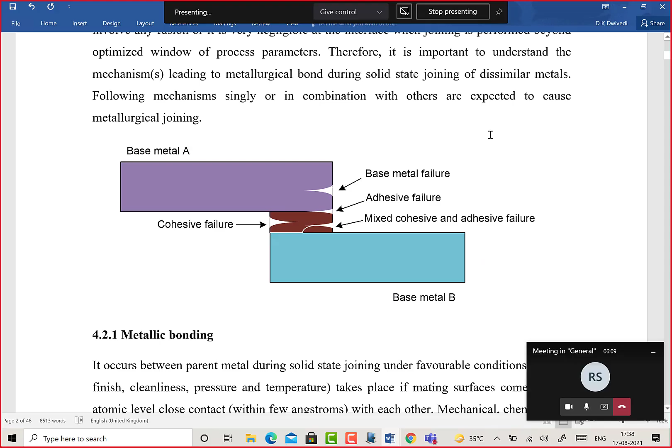The solid state joints are less commonly used for joining the same metal because those joints can be easily done using other joining processes, including fusion welding, except when the metal is very sensitive to heat. Metals with extremely high sensitivity to heat application are preferred to be joined by solid state joining for same metal joining, like metal A and metal A, both components joined together using solid state joining.

If you take any joint, it can fail from any location. Say this is one member and this is another member. These can be joined using a number of approaches: there can be the brazed joint, or the soldered joint, or an adhesive joint just at the interface, then there can be the fillet at both ends. Whenever these joints are developed, they will have a certain tendency to fail under the effect of external load during service.

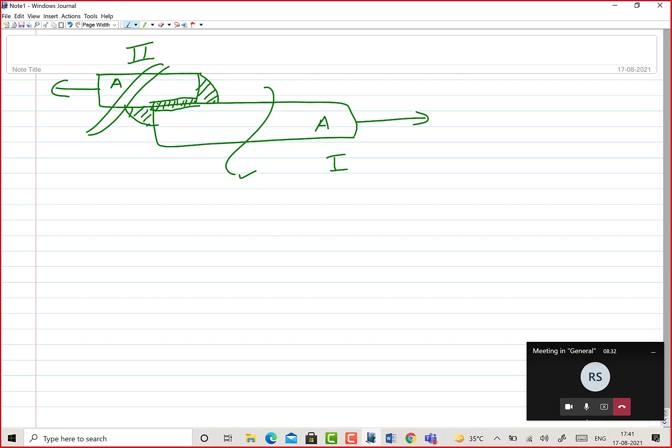This failure can occur from multiple locations. The failure can occur from here itself, like say this is metal A, even if it's the same metal with two parts, part 1 and part 2, being joined. Part 1 can fail or part 2 can fail, from the base metal. This is what we'll call failure of the base metal, where the joint is still strong.

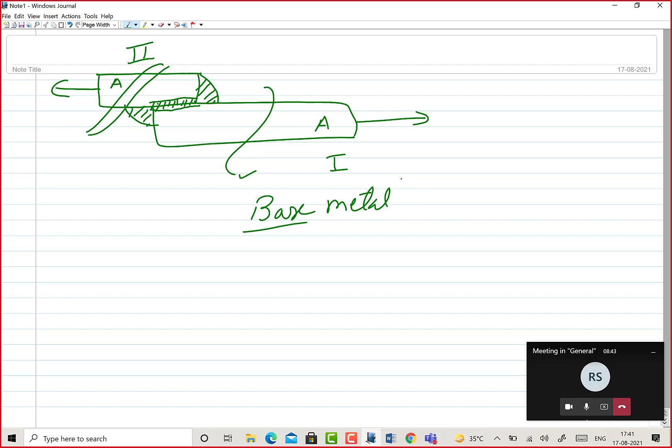The next possibility of failure is where the failure occurs next to the weld region, that's the heat affected zone or the toe of the weld. This is the second situation where the failure is related to the stress concentration zones, at the toe of the weld.

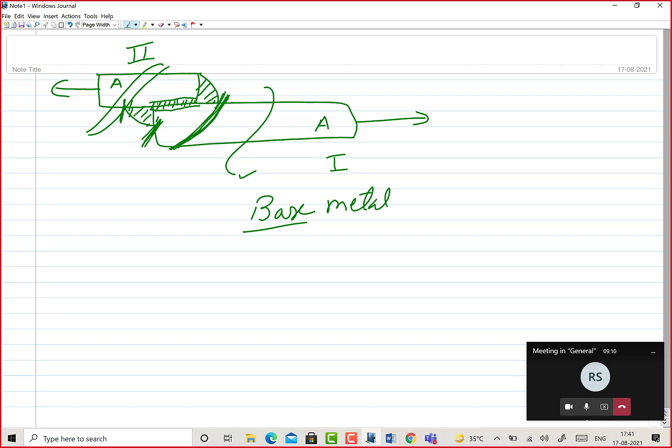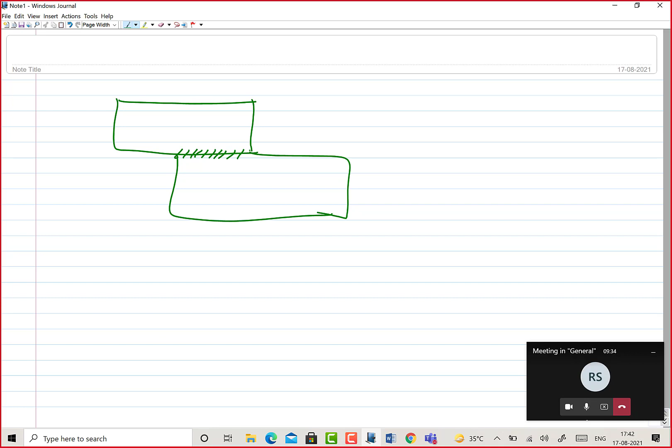The third situation is where things fail directly in the weld zone itself, which can be at the interface. Whenever failure from the interface takes place, it means there is a weakness, the joint is not perfect and we need to work on this region. So wherever the failure in a joint takes place simply indicates the location of the weakness. Interface failure is very common in case of brazed or soldered joints, or also in adhesive joints, because they are not actually as strong as the base metals.

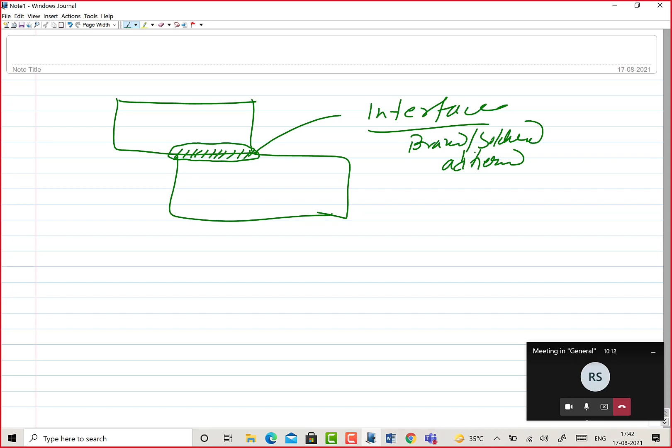But in case of weld joints, where fusion is taking place of the same metal, failure can occur from the base, or from the heat affected zone, or from the weld area itself if it is defective. That is what has been shown. A similar kind of situation you will see in case of solid state joints as well, that is what I was trying to explain using this diagram.

Here this is metal A and metal B, and the two have been joined. What are the various possibilities for failure to take place? This is an example of adhesive failure, or an adhesive joint. The failure can occur from the base metal on one side, or it can fail from the other side base metal. Then there is a possibility of failure from the interface of the joint and one side base metal, or the interface of the joint and the other side base metal, or the joint itself can fail like this.

In case of adhesive failure, when the adhesive itself gets failed, it is called cohesive failure. Otherwise it is adhesive failure, where the interface of the base metal and the adhesive material is getting failed. When both the cohesive failure and the adhesive failure are mixed, then we call it mixed failure. Here adhesive as well as interface failures are both involved, so we'll call it mixed cohesive and adhesive failure.

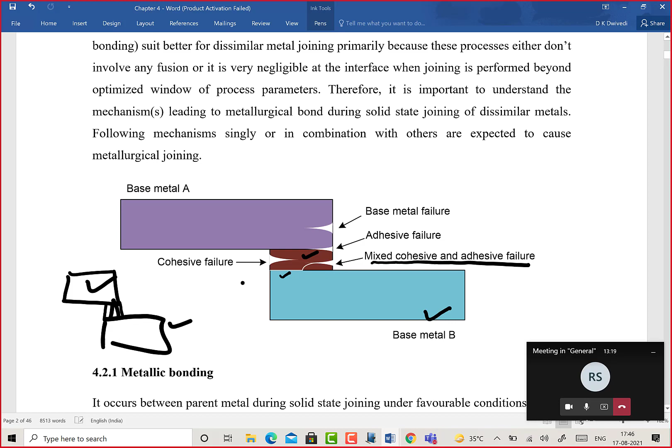A similar kind of trend we can see in brazed, soldered and other weak joints. Now in the situation where we have metallurgical connectivity, either between the same type of metals joined together, or metallurgical connectivity between two members whether of the same metal or different metals, what are the different ways by which the joint is developed, that is what we will see next.

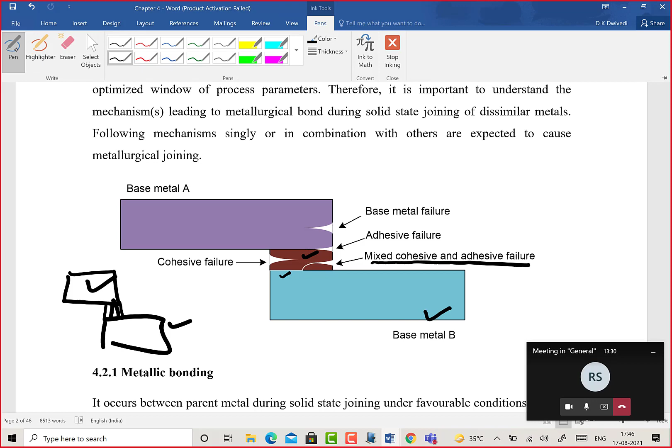We have to see certain mechanisms that play a big role in this process. If we list out the mechanisms responsible for development of the solid state joint, this includes the metallic or atomic level bonding. This is when the two surfaces are brought extremely close to each other.

So there is an atomic attraction between the metals of the two members which are very close to each other. The second mechanism is diffusion, where elements diffuse from one side to another due to concentration gradients of different alloying elements, and they form metallurgical connectivity through diffusion.

The next one is mostly recrystallization, and one typical situation is dynamic recrystallization, which is coupled with deformation and high temperature application. So during the deformation coupled with high temperature, during the joining itself you will be getting newer grains formed - the dynamic recrystallization.

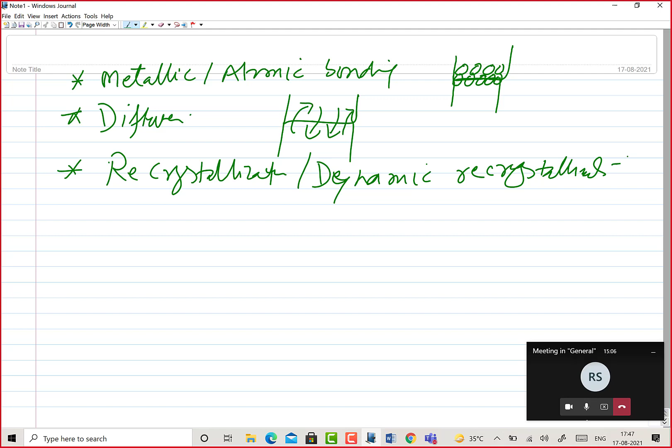So initially you had grains like this on one side and different grains with a different orientation on the other side, and when the two are joined you will see that there is no separation and distinction where the grains were before joining.

So the newer grains even at the interface are developed, and you will see that there is no demarcating line at the interface. This is attributed to recrystallization, or dynamic recrystallization, depending upon the level of deformation involved. If just heat is involved we call it recrystallization; if deformation is coupled with heat application, then it is dynamic recrystallization.

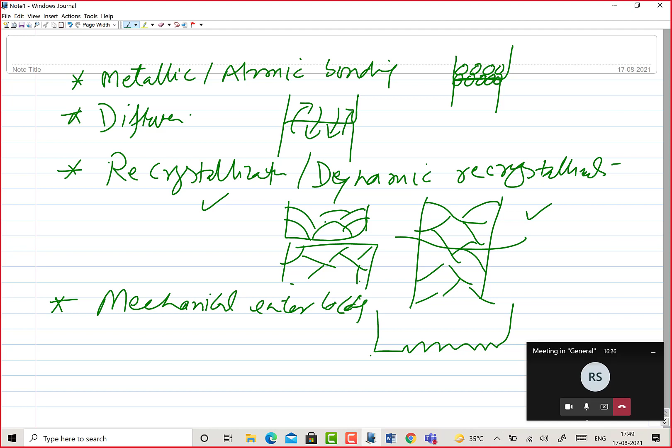Then one very common mechanism in solid state joining is mechanical interlocking. This can be easily seen in a number of joints, like joining of simple wires by twisting. This is very common in processes like ultrasonic welding and explosive welding, where micro level deformation takes place from both sides.

Initially the asperities are connecting with each other at the interface, and once deformation takes place you will see that all these asperities are highly intermingled or interlocked with each other. So this is the kind of structural orientation you will see here.

It can be simple plain mechanical interlocking, or it can be wavy interlocking like this, where some kind of wave at the interface is developed. This is an example of flat mechanical interlocking versus wavy or sinusoidal mechanical interlocking. In both cases, this kind of interlocking is at the micro level only, and it also contributes a lot to development of the joint with the desired strength.

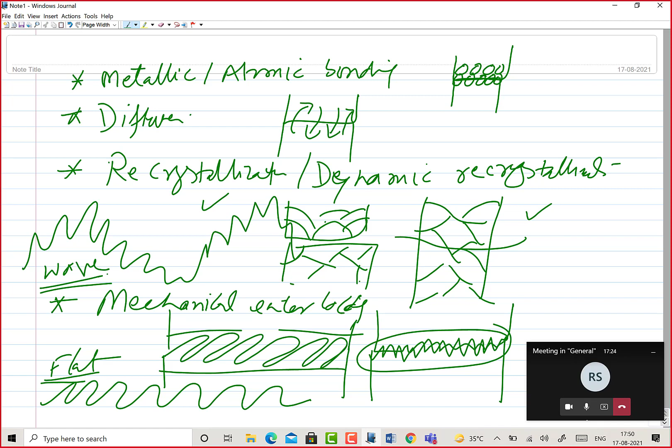Sometimes we also come across localized melting here and there. This is common in processes like ultrasonic welding and diffusion bonding, or if there is inappropriate control of the heat in other processes, then also melting can take place.

This melting occurs at two locations, in two situations. One where low melting point constituents or phases present at the grain boundaries melt, like the eutectic present at the grain boundaries, which melts in a very localized manner. The second case is where low melting point interlayers or fillers are used in diffusion bonding - that is an example of transient liquid phase bonding.

This is done intentionally. So one situation happens because of the presence of low melting point phases, and the second is where the melting is intentionally realized in order to develop the required diffusion bond. So these are the two situations.

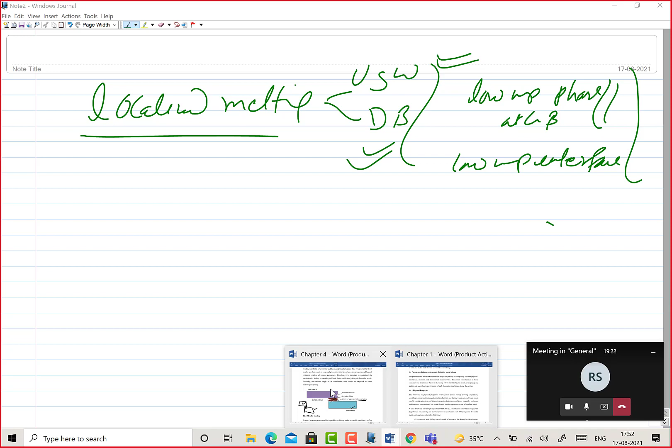So here what you see is the metallic bonding at the atomic level. What you have basically are the two different components with different grains and alloying elements.

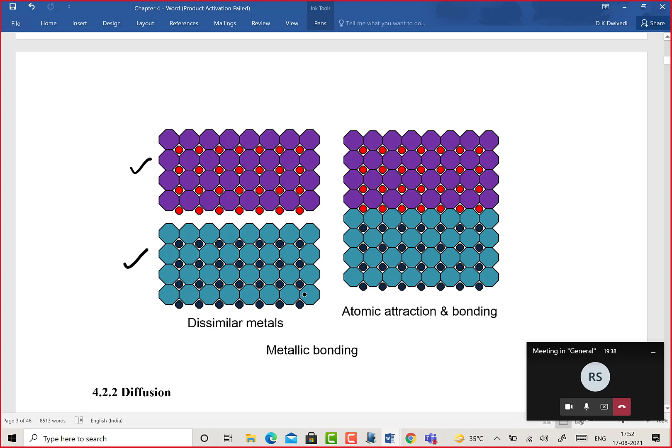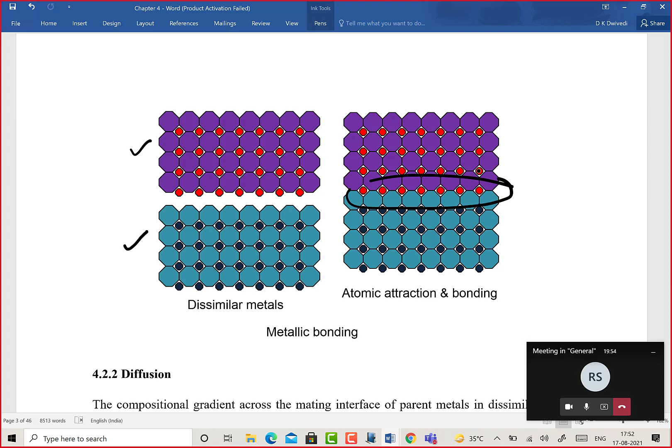When the two are brought very close to each other, you will see there is atomic level closeness leading to a good attraction between the atoms at the two sides, and some kind of weak bond is developed.

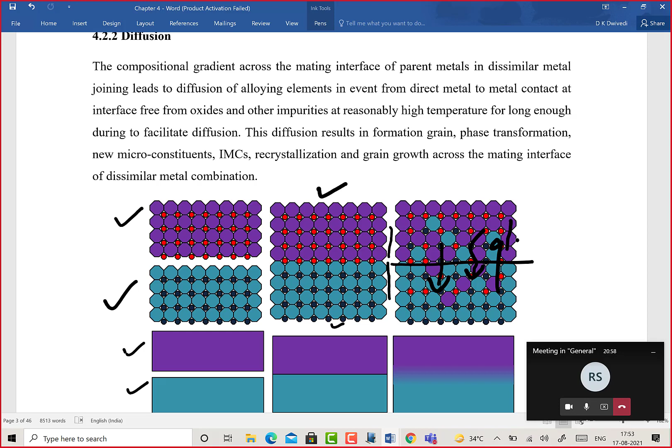So diffusion across the interface is taking place, and that will lead to the formation of new grains. You will not be able to see a very clear demarcating line, but a very diffused one. These are two separate components brought into firm contact with each other, and when diffusion takes place across the interface, there is no very clear demarcating line across the grain boundaries—even the newer grains you can see.

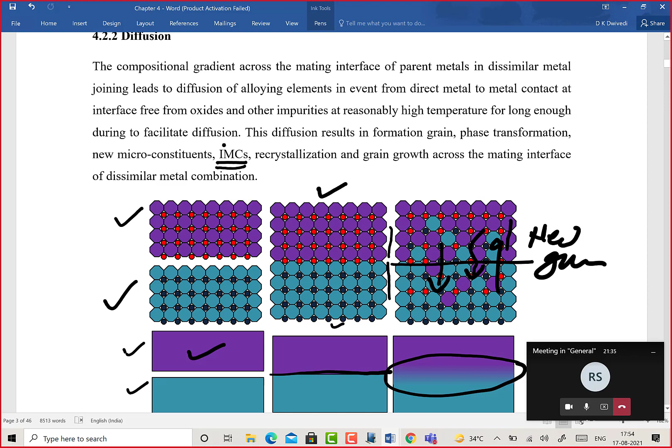So this is the case of diffusion, and if the two are incompatible with each other, then certainly they will form some kind of intermetallic compound, or newer phases can also be formed.

Localized melting is a third mechanism, where you will see that the two metals, or even the same metal, may have low melting point phases at the grain boundaries. So low melting point phases and impurities can reach the molten state—this is, you can say, discrete melting here and there.

The second case is where the interlayer has been intentionally used. With the application of heat, this interlayer will melt and then diffuse—the elements can diffuse from the interlayer into the base metal. This is what is typically achieved in case of transient liquid phase bonding, where things melt and then diffuse out.

Once the diffusion completes, solidification starts due to the change of composition of the molten zone which formed during diffusion bonding in case of transient liquid phase bonding. Localized melting can occur here and there—say you have used some kind of interlayer, it leads to a eutectic reaction and melting takes place here and there.

There is a possibility that melting can lead to weakening because of the formation of brittle and weak phases, or it can lead to improved bonding. It depends on the kind of constituents formed as a result of the melting.

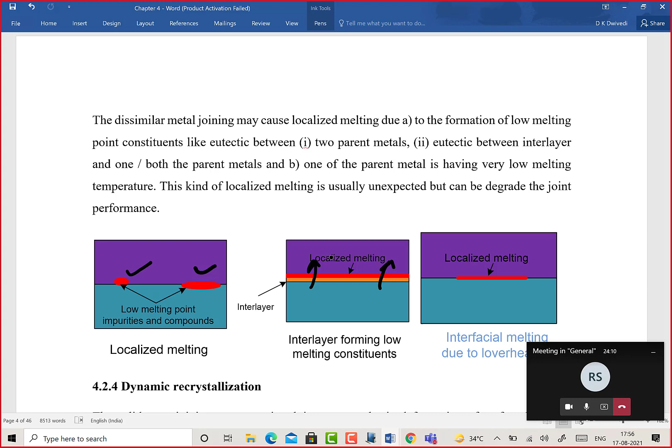In that case the strength may be quite good, while in other cases where it is not intentional—where the low melting point phases are formed unintentionally, or present due to poor control over the composition—the strength may be badly compromised.

Dynamic recrystallization is very common in case of solid state joining processes where plastic deformation is involved. Whenever there is plastic deformation coupled with heat generation, coming either from friction or deformation, that will lead to dynamic recrystallization.

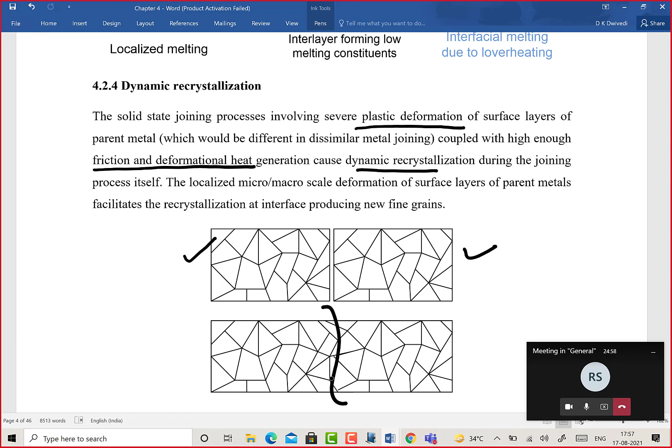Say initially the grain structure of the two members is like this. When the two are joined with the help of micro or macro level deformation, you will see there is no clear cut demarcation—newer grains are formed across the interface in the two components. This kind of situation will lead to the development of a good weld joint.

Mechanical interlocking is the next one, which is very commonly observed in explosive bonding, electromagnetic welding, and ultrasonic welding.

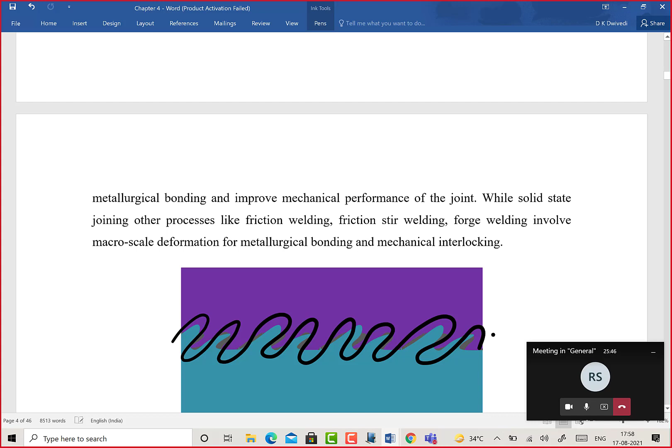In all these cases, all these processes are used for joining a thin sheet with another member. There can be tubes, there can be thin plates. In both cases, what we see is some kind of mechanical forces used to cause interfacial deformation, and whenever that takes place, you will see localized deformation occurring at the interface. This is a typical example of interlocking.

Mechanical interlocking. But when two metals are brought into very close contact, they may be metallurgically incompatible, so they may also form some undesirable constituents at the interface. However, the amount of those undesirable intermetallic phases may be very limited, but still those are formed.

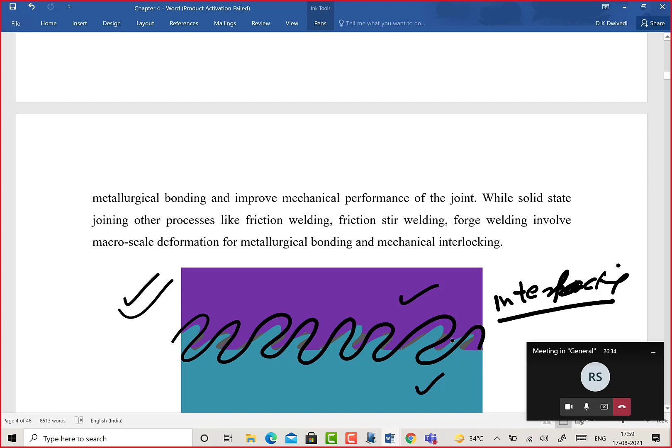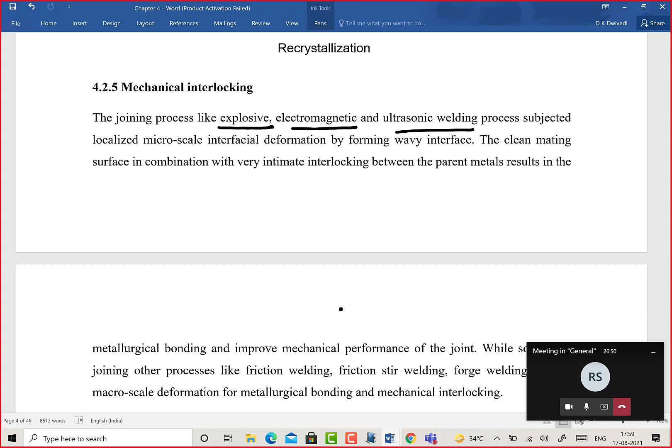Solid state joining processes like friction welding and friction stir welding are based on large scale deformation. But what I am showing you here is basically related to micro-level deformation, which is observed in case of explosive bonding, explosive welding, electromagnetic welding, and ultrasonic welding, leading to mechanical interlocking.

So here, since we are not achieving the fusion state for developing metallurgical continuity between the two metallic members, whether they are of the same or different types, to develop the metallurgical continuity in case of solid state joining processes, two things are very prerequisite.

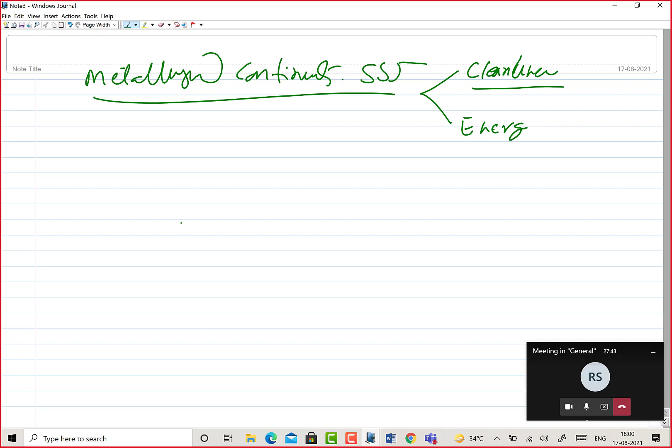Two things are important: one is the cleanliness, and the second is the energy barrier must be overcome. So crossing or overtaking the energy barrier and the cleanliness — these are the two important things.

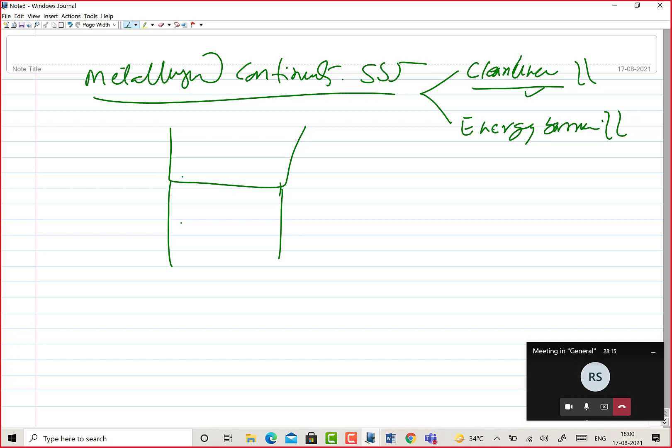This cleanliness-related aspect I have talked about a number of times earlier as well. To realize metallurgical continuity, we need diffusion across the interface, and to facilitate the diffusion, there must be direct metal to metal contact at the interface, free from any thin layer of impurities present on the actual surfaces.

All oxide layers, adsorbed gases — these must be removed, and it depends a lot on the type of oxides and nitrides being formed, their properties, particularly hardness and brittleness.

If these oxides are soft and ductile, then certainly you cannot do it easily. Rubbing can help remove these surface impurities easily if they are hard and brittle, and this is further easier in case of dissimilar metal joining, because if it is similar, both will behave in the same way. If dissimilar, they behave differently, and it becomes easier to cause separation and removal of these oxides and impurities from the surface.

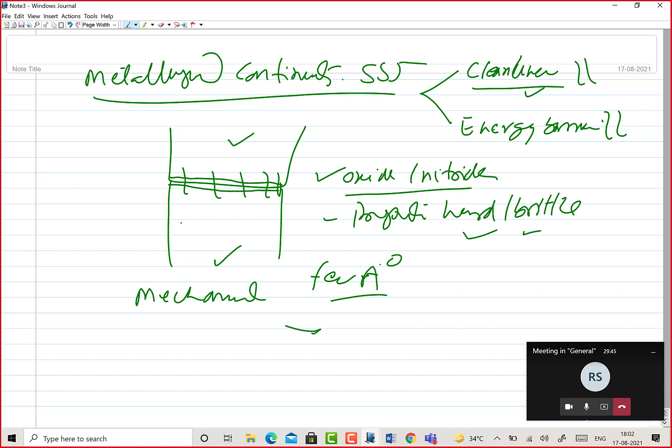That is why just mechanical cleaning will not be good enough, because these layers are very thin, maybe a few angstroms, and very hard and brittle, especially like chromium and aluminium oxides. These oxides are very stable and very adherent, very coherent with the surfaces, and very thin also. So just mechanical cleaning may not be good enough.

You need chemical cleaning as well for removing all these impurities present at the surface. Sometimes in solid state joining, if interfacial deformation is involved, that will inherently clean the surfaces and try to clear all these impurities.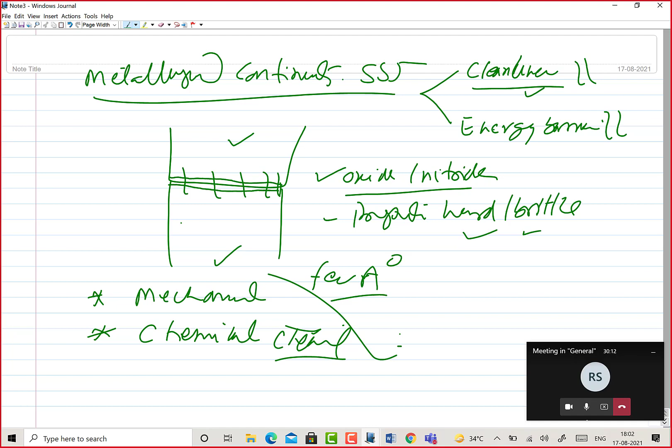On the other hand, as I said, the mechanisms involved are primarily diffusion and recrystallization. And there is a third mechanism also that you see.

To develop metallurgical continuity, both are usually present in solid state joining. There must be sufficient amount of energy applied in the form of heat to facilitate the diffusion and to develop newer grains through recrystallization.

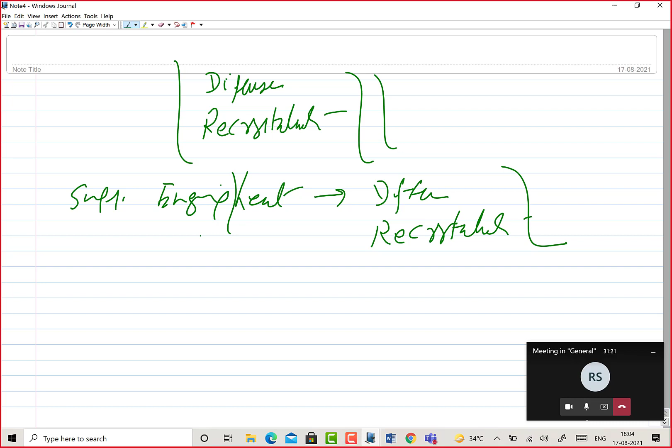So one philosophy is this: this energy required to facilitate the diffusion as well as recrystallization must be supplied to facilitate the metallurgical bond in case of solid state joining.

But the problem here, and this is very common in most solid state joining processes, is that we apply energy in different forms, whether it is deformation or frictional heat — it is always there, and that is why we get both the diffusion as well as the recrystallization.

This is one aspect. But the problem in acceptance of this hypothesis is this: if you take two metals and put them in firm metal to metal contact with each other under sub-zero conditions...

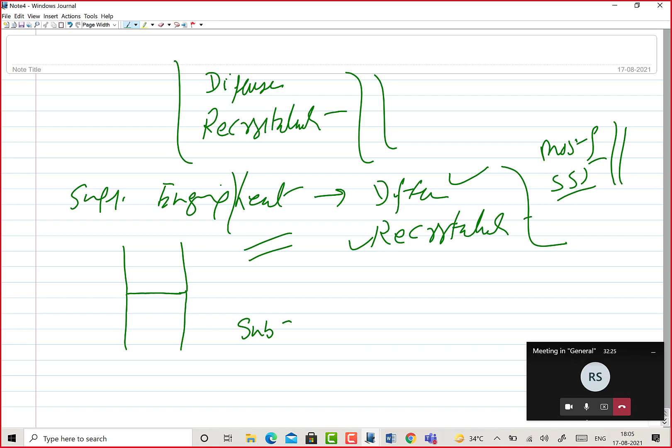When we are putting the two components in firm metal to metal contact under sub-zero conditions, there is no driving force for diffusion and recrystallization to take place. Still, the joint is developed, maybe it will take 4 months, 6 months. It is very difficult to expect any kind of recrystallization and diffusion occurring under sub-zero conditions. So that is why these are the two theories which are not equally acceptable for all situations.

There is one more aspect that has been explained: misorientation. You know that at the grain boundaries, the arrangement of atoms is highly irregular, the structure is amorphous. Similarly, the surfaces of the two components to be joined may have different grain orientations, different arrangement of atoms, different kinds of crystal structures. So it may not be the same necessarily, even in similar kinds of metals.

So to have metallurgical continuity from one side to another across the interface, the energy must be overcome for facilitating the metallurgical bond through the misorientation. So energy to overcome the misorientation of the atoms to facilitate the metallurgical bonding is the third aspect which is being proposed, apart from the energy requirement for diffusion and recrystallization. People are still working on to understand this aspect, like what is its importance and significance in the development of solid state joints.

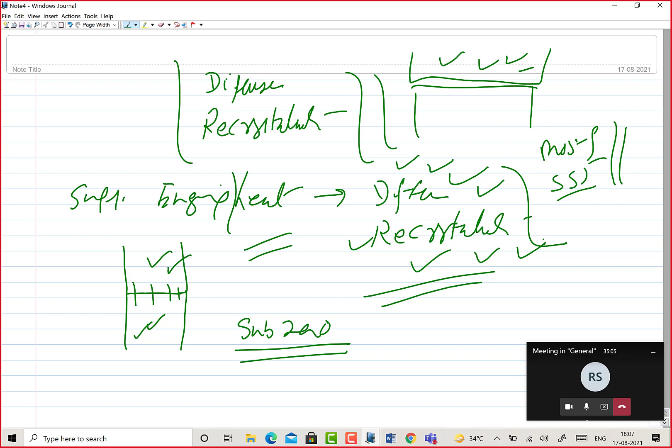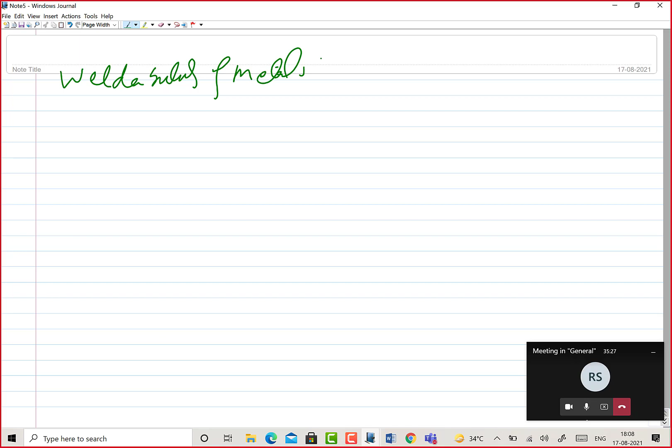Now coming to the another, third aspect about which I wanted to talk here: weldability of metals by solid state joining processes. So how to understand this, and why it is different for different metals and different situations. Now, ease of joining - how do we characterize this ease of joining or ease of welding?

Power can be one thing because it is affecting the cost. But this is not a very good way, because in any case we have to apply the energy. So what we do basically is quantify energy consumption per unit length of the weld, which may be different for different processes as well. Energy requirement.

Penetration is about whether the joint is perfect or not, right? The joint is imperfect if it is partially penetrated - it is imperfect and you will simply reject it. So there are certain ways to understand this. Let us understand what weldability is and how we characterize it in a comprehensive manner.

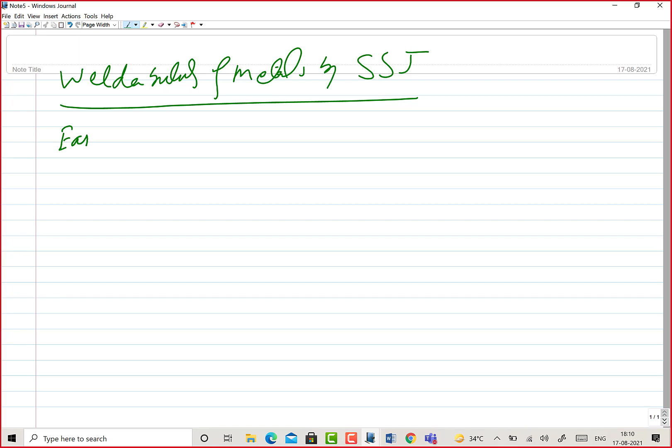The thing is, weldability - you see it is very easy - it is ease of joining or welding of a given metal, we will say, because for different metals the weldability is different. But for what? Again, there are a number of constraints. Ease of welding or joining of a given metal.

Now we will be putting in constraints: ease of welding of a given metal for a given procedure - you can say it is the joining procedure. So, ease of joining or welding of a given metal, by a given welding procedure, for a given purpose - joints can be developed for different applications; for one purpose one joint is fine, but for another application the same joint may not be acceptable. So what we say: ease of joining of a given metal by a given welding procedure for a given purpose, under a given

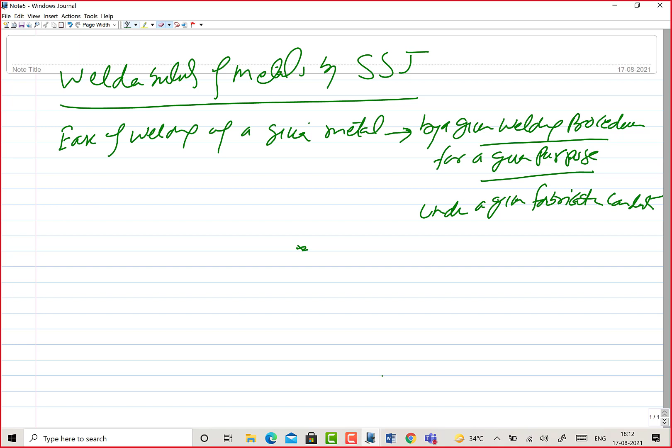If you change any of these things - say, for example, if you take a metal A, when it is welded by process X, for purpose Y, and under fabrication conditions Q, then things are not workable, things are very poor. Why? Because it's not happening, or it is taking too much cost. If you work with another process, say your process is Z, the purpose is P, and your fabrication conditions are R, then with another set of fabrication conditions, it's fine, it is acceptable.

Let's take an example: if you take aluminum and use SMAW, you may find the joint is not working for the purpose. But when you weld aluminum by GTAW or GMAW, the joint is perfect and very easy to make.

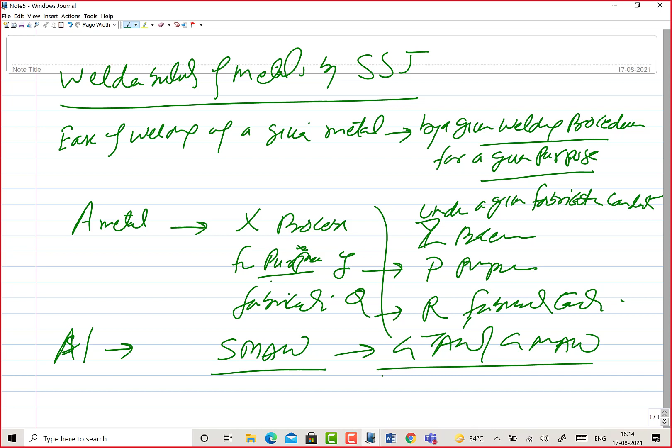Now I'll take the things related with the purpose. You make a steel weld very easily, whether it's solid state joining or any other process, and it works fantastically under normal ambient conditions, say temperatures from 20 to 40 degrees, it's fine. But when the same weld joint of steel is used at -10, -20, it doesn't perform, it loses its toughness, it loses its ductility, it becomes brittle. So your joint is not able to perform under impact or tough conditions. The purpose has changed.

Similarly, in fabrication conditions, whether it's aluminum or steel or any metal, any welding process being used, the easy position to weld is downhand, then it becomes more difficult, like welding a pipe, or welding a very thick sheet of 50mm versus just 0.5mm—all are very difficult. So fabrication conditions may change significantly. Similarly, a simple butt joint will be easy, but an edge joint or corner joint will be more difficult. So depending upon the fabrication conditions, your ease may change significantly. This is just one aspect.

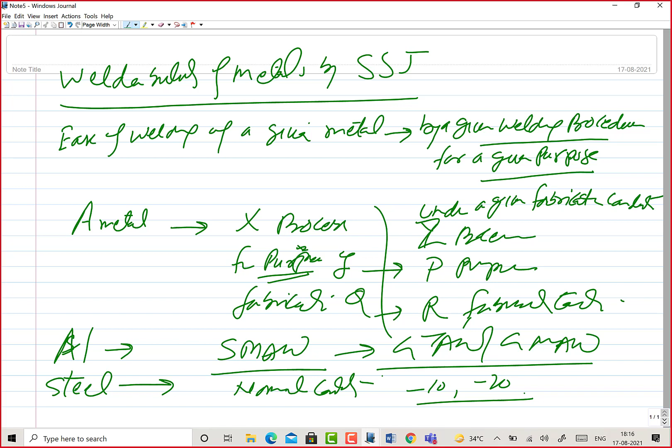Let us take other aspects, because I have used three words: first, the procedure; second, the purpose; and third, the fabrication conditions.

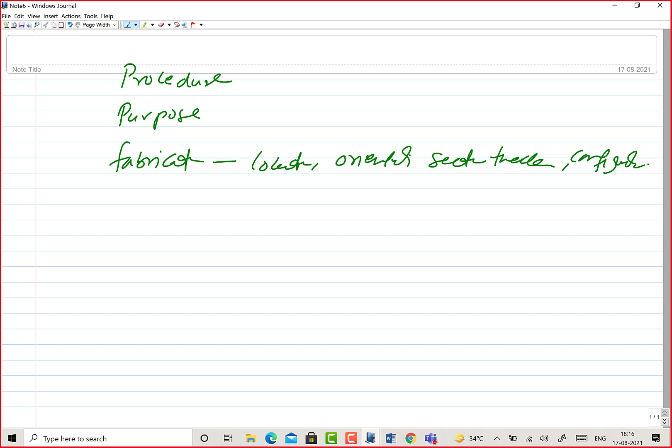There can be a number of aspects related with the location where the joint is to be made, the orientation of the plate, section thickness, and the configuration in which the joint is being made—whether it's a lap joint or butt joint, or where the joint is to be made. Then the purpose: there can be n number of situations—normal ambient condition, static loading, fatigue loading, creep, or low temperature application. So as per the case, the situation may change significantly.

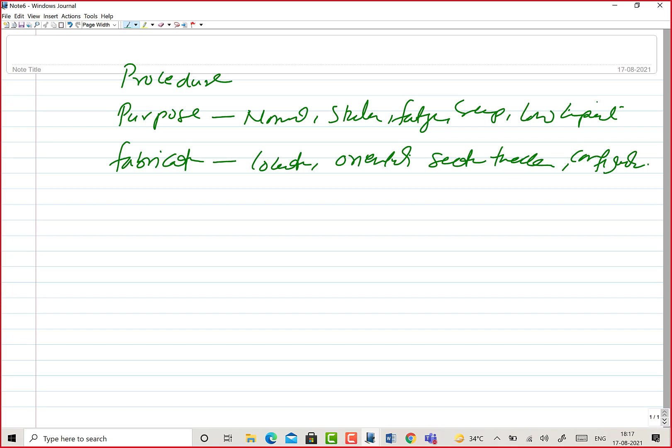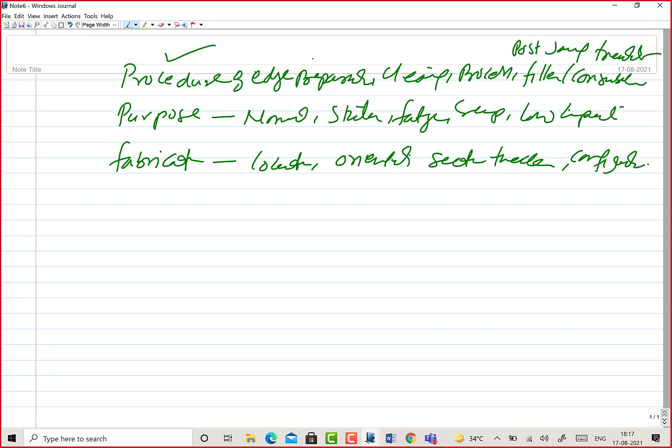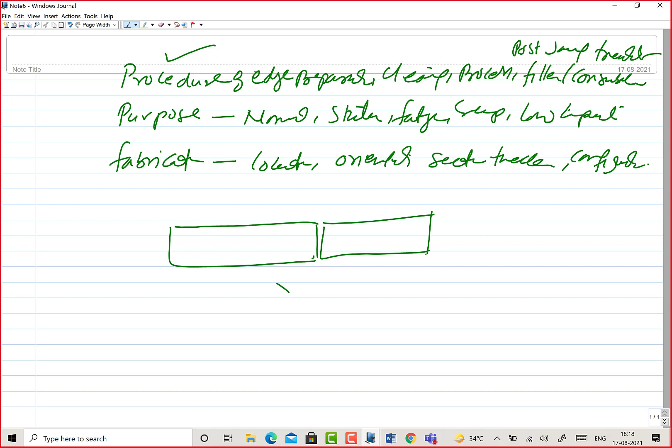Similarly, procedure. What do you think will be included in the procedure? Starting from your edge preparation, involving cleaning and cutting, then the welding or joining process being used, the kind of fillers and consumables being used—all these affect the performance. And then the post-joining treatment—all these are part of the procedure. If you change anything, your ease will change. For example, if something can be joined directly without any edge preparation, this is best, because you don't need to prepare the things. You just do the joining and get a joint.

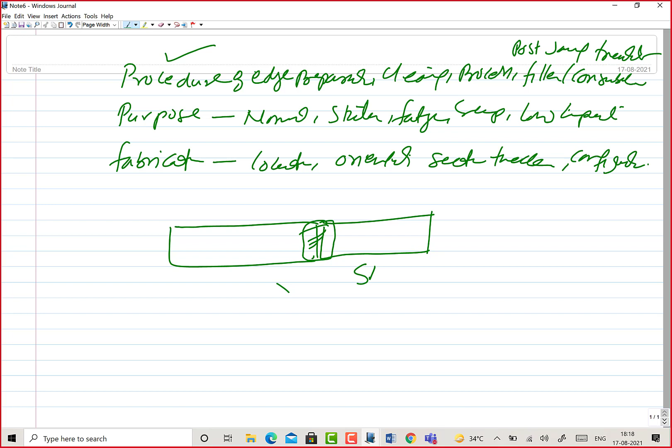But in a number of cases, you may find you have to prepare the edges, do the cleaning properly, and use a process which is not easy to apply and needs huge investment. If something can be done very easily using SMAW, why would you go for laser or electron beam? Why would you use GTAW, which needs inert gases? Certainly you will not go for that. If a metal needs just GTAW and not other processes, that will be affecting cost.

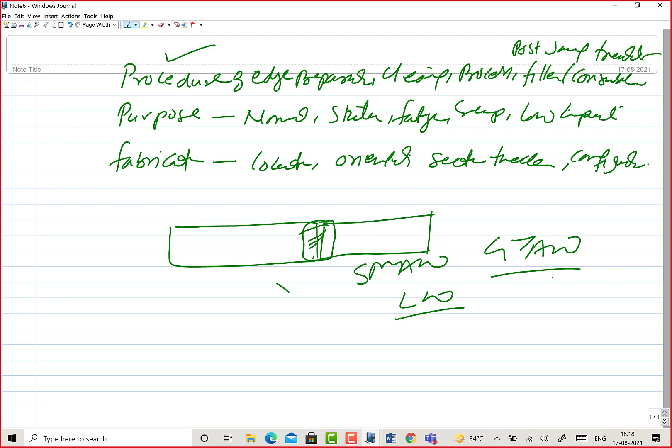Now I'll come to another aspect as far as weldability is concerned—easy to understand is the weldability. So those are the three ways by which you need to fix the dimensions that you need to see while identifying the ease of joining of a given metal.

Now, weldability in a very simple way: when you develop a joint using a given procedure, what about the joint quality? So you are fixing the welding or joining procedure, and thereafter trying to see what kind of quality you are getting. The quality of the joint can be seen in a number of ways—soundness, appearance, or performance as per the requirement. This can be mechanical performance, corrosion performance, tribological performance, it can be anything.

Now the second thing related with weldability is the cost. Okay, just a minute.

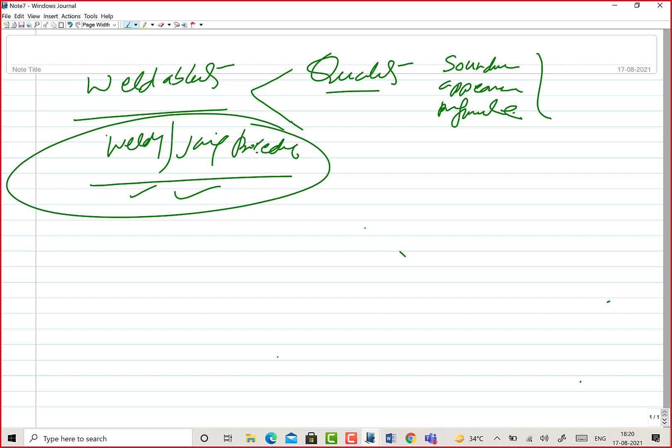So here the quality for a given joining procedure or welding procedure, what kind of quality you are getting, and for this procedure how to identify this procedure and for which you are getting a particular kind of quality.

So this procedure thing is being understood or considered from the efforts. In general, if you have to put in less efforts, you don't need any edge preparation, you can use simple mechanical cleaning, simple SMAW process, you don't need any post weld heating, there is no need of cleaning after the welding. All those things will be making your life easier.

So the efforts required to develop a joint will be reduced, meaning the cost will be reduced, time will be reduced. For lesser cost, if you are getting good quality, your weldability will go high. So what you need to see is the quality of the joint and the efforts that you put in, in form of the procedure. Like less efforts, simple procedure, good quality, gives easy or good weldability.

Now efforts we need to see in little more detail, like the edge preparation that you need. If you need a simple square groove, or normal accuracy, that's fine - but for laser welding you need very straight edges because the laser spot is of very small size. If even normal machining is fine, giving high roughness, that's good for normal conventional welding.

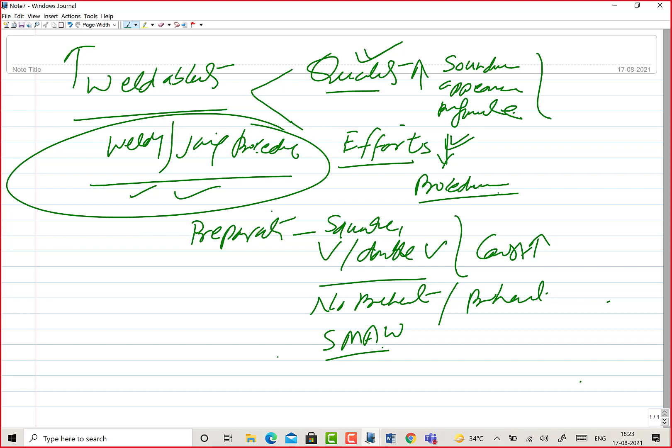No preheat is good. Now the joining process - if we are working with SMAW, you don't need costly shielding gases and it can be easily applied. But if you need to use specialized processes like GTAW, GMAW, or FSW, or diffusion bonding - those processes which are specialized will simply be increasing the cost.

Then after the welding, the kind of post-joining treatment that are needed. If no treatment is required and you are getting very good quality joint after joining, then it's fine - this will reduce the efforts.

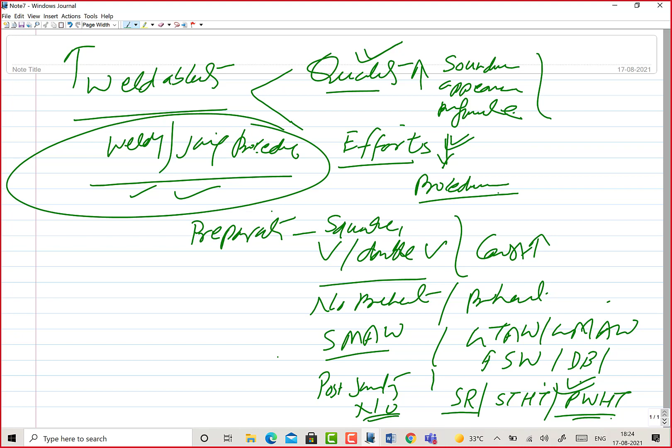Otherwise you may use stress relieving, ultrasonic stress relieving, or stress relieving heat treatment, or you need to perform full-fledged post-weld heat treatments, like tempering, or simple normalizing and then tempering. So there can be a number of possibilities.

Now, as far as this ease of joining is concerned, weldability needs consideration of the quality and the efforts that you have put in. Efforts we can quantify in terms of the procedure, the joining procedure being adopted - in form of edge preparation, preheating, the joining process being used, or the post-weld treatments which are needed.

So if you need the minimum steps, it will help reduce the cost and the efforts needed, so that for a given joint performance it will improve the ease of joining. Lesser the efforts, better the quality - this combination will simply increase the ease of joining. That's how we can see the ease of joining.

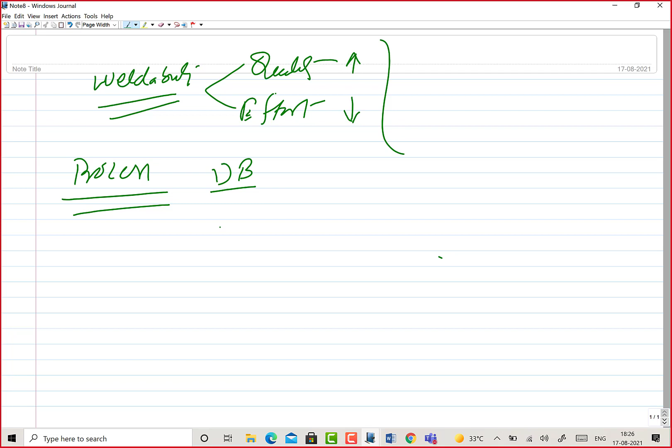Now coming to the ease of joining - it actually depends on a number of other aspects. Like, if you take a given process, because it is solid state joining, it has to be seen. If you take one process, say diffusion bonding, and you take another process, say FSW - the efforts needed for the two processes may be entirely different.

The time required may be different, and the kind of preparations, the kind of performance that we get, can be entirely different. Very good surface preparation in form of smoothness and cleanliness is needed for diffusion bonding, whereas this can be casual for the other process - you just need to clean it up so there is no grease, oil, paint, dust, dirt etc. on the surface. But here it has to be very clean, very smooth, like less than 1 micrometer, which will be needed.

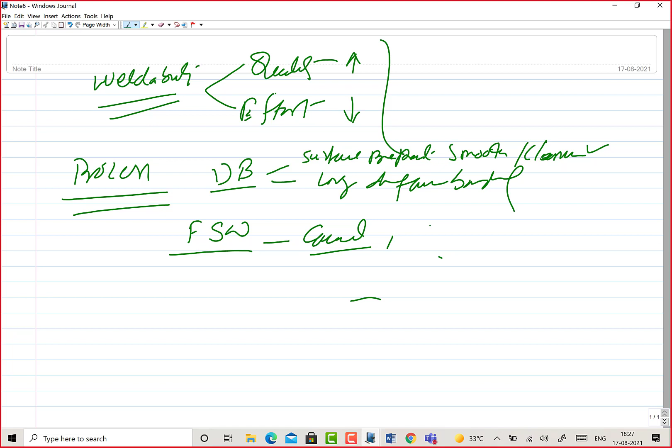Diffusion bonding takes a long time, whereas this bond joint can be developed in maybe 10 or 15 minutes once you hold the job in the machine. So this process is fast and the other is slow. One diffusion bond may take 2 to 3 hours, and here it may take 10 to 15 minutes. There is a lot of difference.

So the two processes may not be directly comparable. One is very easy, another is difficult. You have to see where you can apply FSW, where you can apply diffusion bonding. Based on the ability of the process you have to choose, because every metal cannot be joined by every process, and every dissimilar metal cannot be joined by every joining process.

We have to see what is possible with a particular set of machines or joining processes or joining technologies. For example, solid state joining processes like ultrasonic welding, explosive welding, magnetic pulse welding are used for thin section joining - thin sheets, thin tubes, thin plates, thin films. These can be joined, but if both are of very heavy section, they cannot be joined.

Similarly, if the metal does not have any ductility, then you cannot do anything with FSW. There has to be some ability of the metal to get deformed, for forge welding as well as for friction welding. It depends on what is the requirement of a given metal, and what is the requirement of a given process to develop the joint, so that we can see whether a given metal having a certain set of properties can be joined by a given process or not.

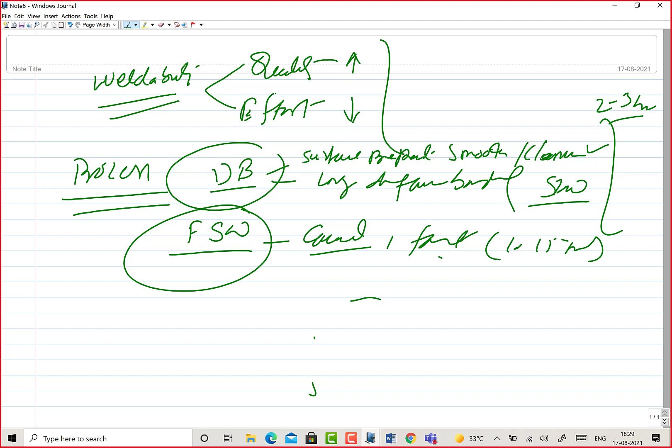So to see the ease of joining of different metals by solid state joining process, we have to consider certain aspects or factors. What we can simply call the factors affecting the weldability of solid state joining processes. I hope with this background you will be able to easily get what I'll be saying now.

Solid state joining needs deformation, whether macro or micro. It also needs diffusion, and it needs recrystallization for development of the joint across the interface. These are a few very important things that are needed. So all the factors affecting these three things will affect the ease of joining, as you will see gradually.

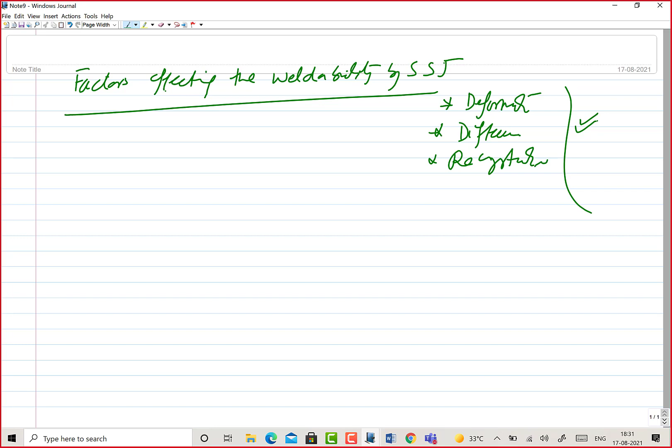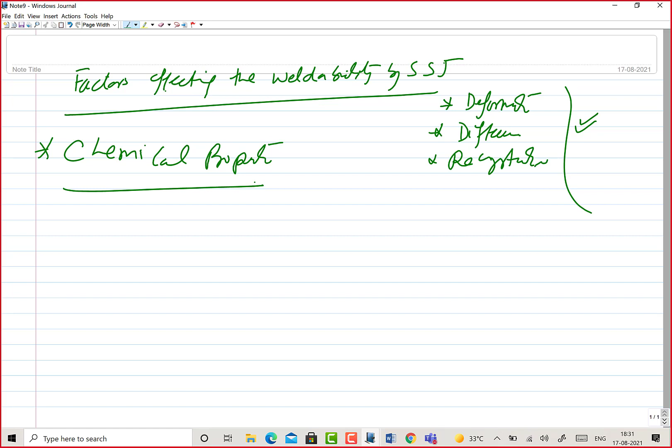The first factor is the chemical properties of the metals - the composition, and the affinity of the metal to atmospheric gases. This is the second aspect.

Then we have the physical properties of the metals which are to be joined by solid state joining. The physical properties of the metal which are of great importance from the solid state joining point of view are the thermal conductivity and thermal expansion coefficient.

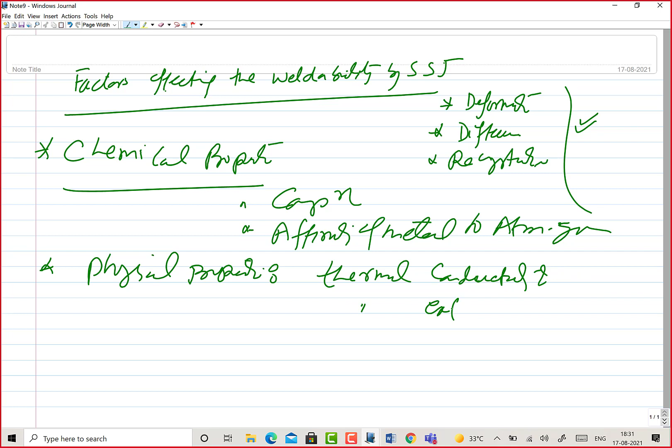As far as mechanical properties are concerned, because we need deformation also, these mechanical properties are important - yield strength and percentage elongation, that is the ductility of the metal. And from the metallurgical point of view, work hardening as well, the way by which the metal responds to work hardening.

The fourth one is the dimensional properties - like what is the thickness to be joined. You cannot apply all joining processes for all kinds of thicknesses of the work material to be joined, so thickness is one thing. Then the kind of configuration, whether it is a plate or a pipe or any other complex geometry, or the kind of joint we have to make - the joint configuration or shape or geometry in which the joint is to be made. These are the dimensional properties which will certainly affect the ease of joining by solid state joining processes.

So the details of these things, or the role of these factors on the ease of joining or weldability of metals by solid state joining, is what I will be talking about in the next lecture tomorrow.